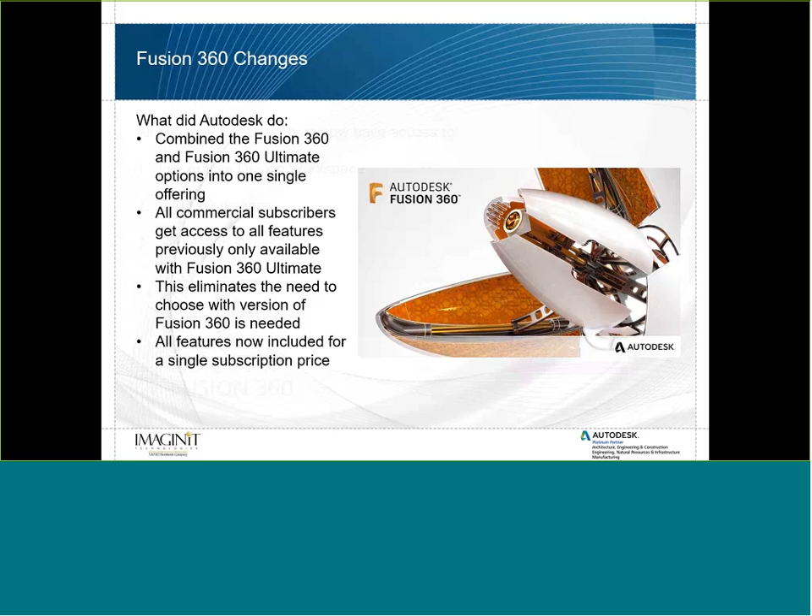So what has become available? All commercial subscribers now have access to the Generative Design Workspace, the CAM Workspace, and the Simulation Workspace within Fusion 360. We'll take a look at each of these individually as we go through the remainder here.

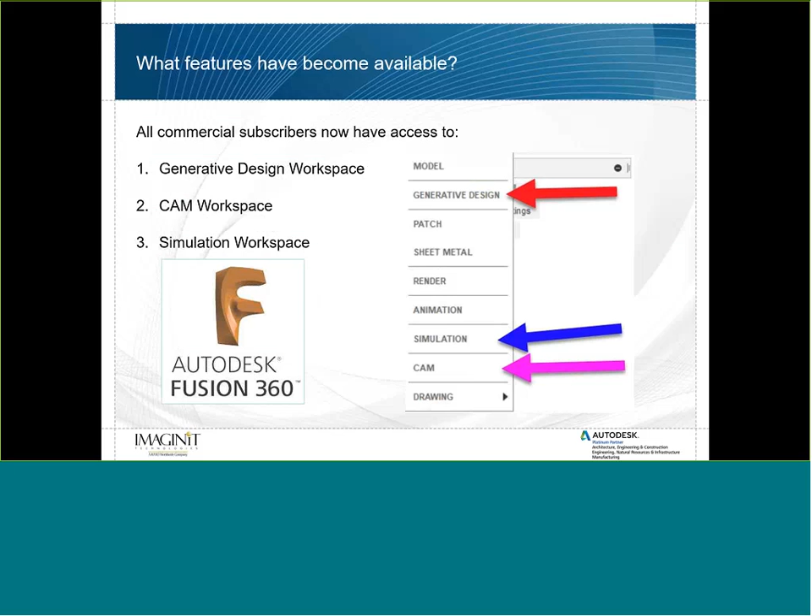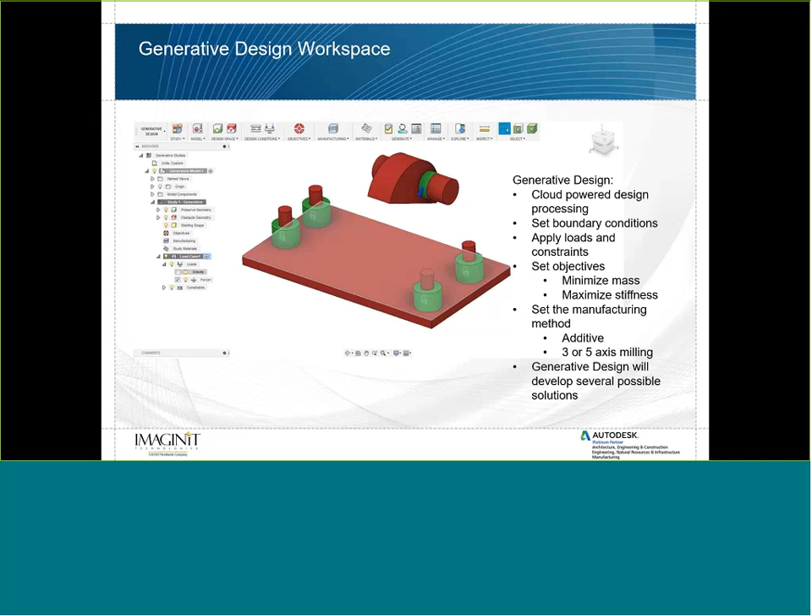For generative design, we're going to do a quick overview on the PowerPoint here, then jump into the software and explore it some more. Generative design is a cloud-powered design processing system software. What you do is set the boundary conditions for your part, apply a series of loads and constraints, and then set objectives - do you want to maximize the stiffness or minimize the mass of your part. You can set the allowable factors of safety, and set the manufacturing methods, whether it's going to be additive or 3 or 5 axis milling. Once we've done all that, we can run the study, and generative design will develop a number of possible solutions - some easier to manufacture, some not so easy, and some of the designs and shapes get creative. We'll dive into this more in just a couple of minutes.

You also get access to the simulation workspace. This is, again, a cloud-powered simulation because everything on Fusion 360 is cloud-powered. Fusion can do static stress, modal frequencies, thermal stress, structural buckling, nonlinear static stresses, event simulations - which is a preview of that - and shape optimization. We'll take a look at the static stress specifically today.

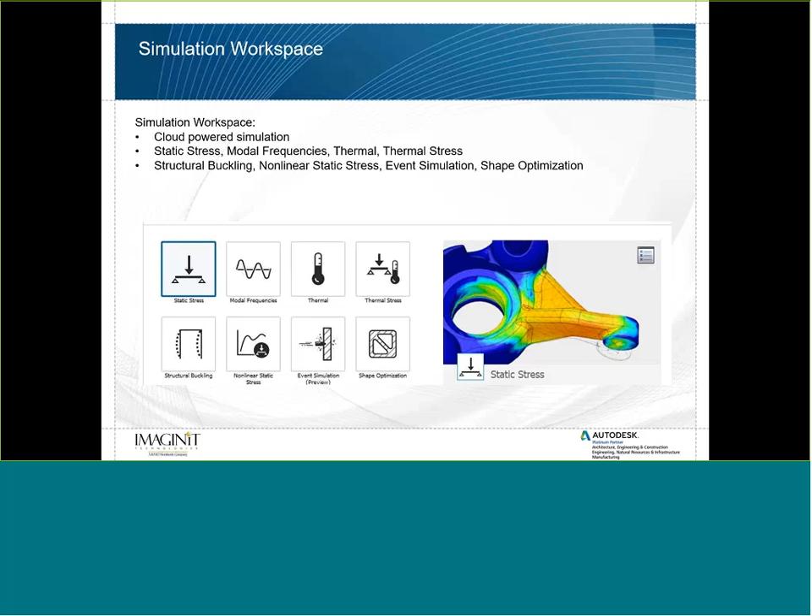The final workspace you get access to is the CAM workspace. If any of you have had experience with Inventor's HSM, you're going to recognize a lot of these tools here. So it's 2.5, 3, and 5 axis tool paths. We can do turning operations on a lathe, cutting operations, plasma, laser, water jet. The software provides tool path simulations to see how the tool is going to look as it moves around your part. We'll take a look at the tool library that Fusion has, and then maybe develop a simple post-process. Fusion comes loaded with a number of post-processors from common machine manufacturers that are already included. All right, one second here, and we will get into Fusion.

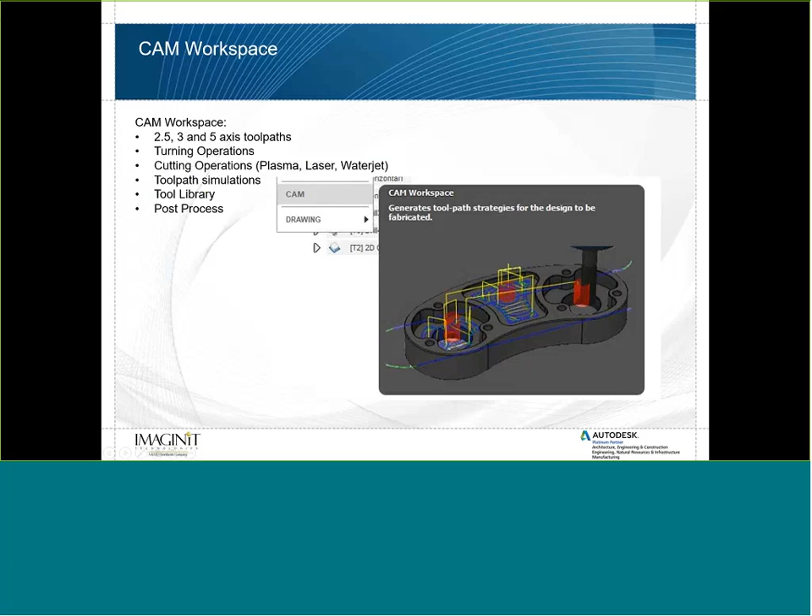Okay, so here we've got a simple lifting lug. Not a very complicated model, not a whole lot to it, but it'll be a good way to show the different tools that are available.

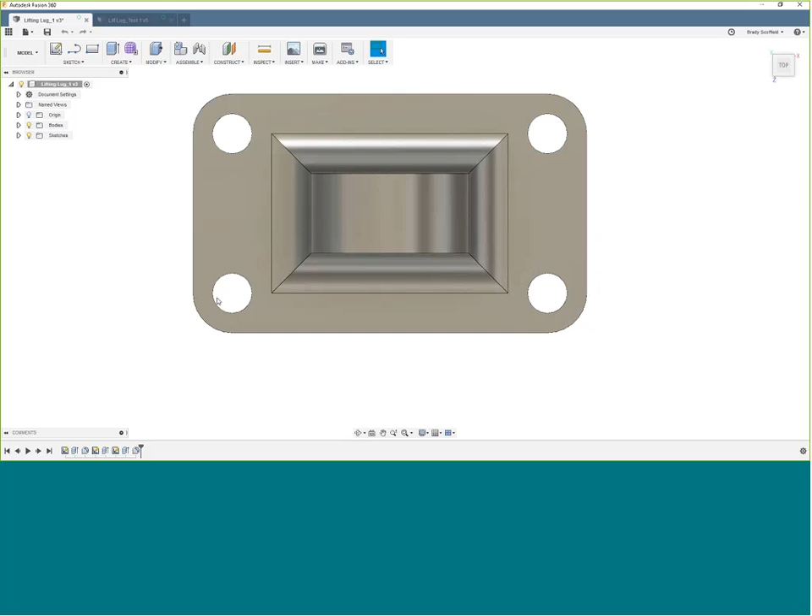So here we have the lug. You can see, looking down from the top, 4 holes in the top where this would most likely be bolted to some other fixture or part. And then we'd put a clevis or a pin through this larger hole to lift our load.

So we're going to start in the order we did the PowerPoint, looking at the generative design first. Here we have a simplified model, right? Here's the lifting lug itself. Click back, here's the model.

With generative design, without going too far into it, you basically model what you need. I tell it that I need to have a shape similar to this up top. I have a body going through the middle here where I'm going to do some exclusions to create a hole through there, and the same with these 4 posts down at the bottom.

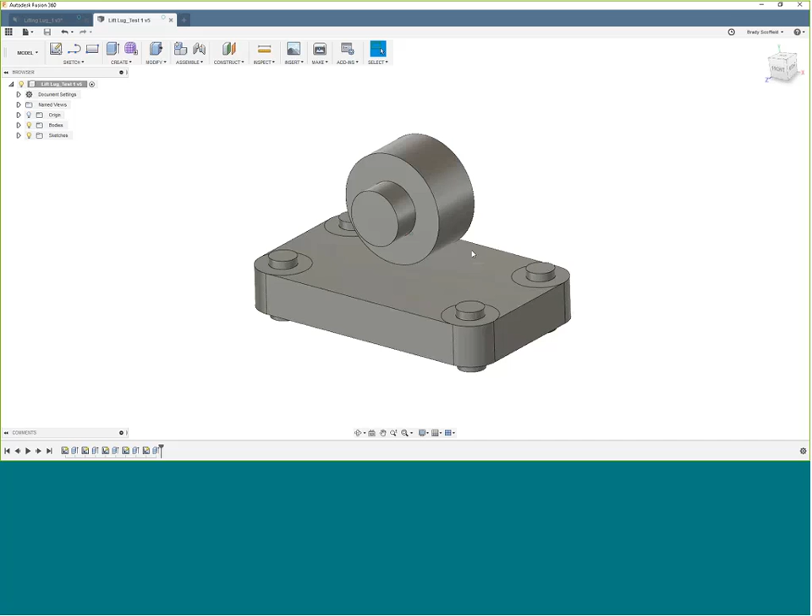So like with all of the other environments and workspaces in Fusion, you simply come to the Model tab, and then we click on Generative Design. This is a new location for this, as Generative Design in the past was located up here in the ribbon, and it was a separate software that would open up. They've now basically loaded it native into Fusion 360.

So if we click on Generative Design, we can see that I've got a couple of studies already set up here. But let's go ahead and start and set up a new one.

So I'm going to make sure all this stuff is hidden, and I'm going to generate a new study. So we've got study 4. I'll show you studies 1 and 3 a little bit later, but let's walk through the process here of how to set this up. So the first thing we need to do is come to this area here.

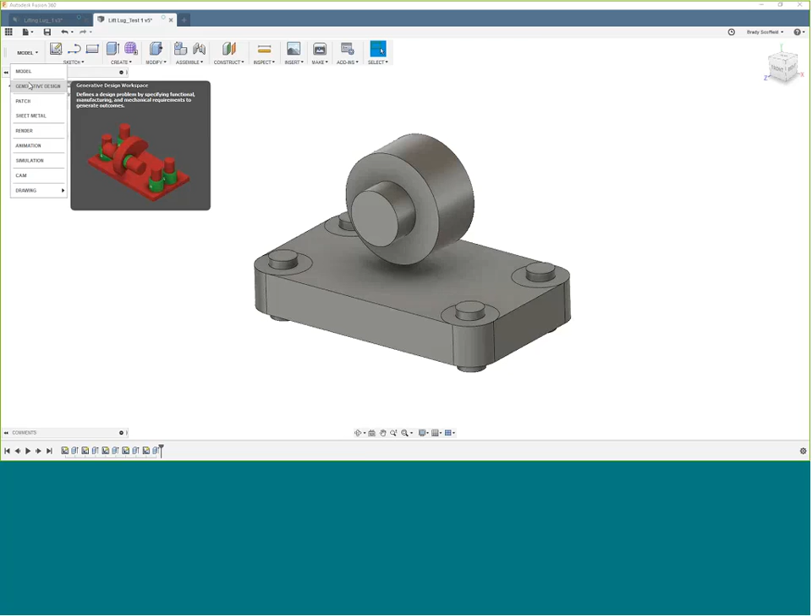We've already got the model loaded. If you want to edit it, we could go into the Model tab or the Model option and change it. But we're going to pick the geometry we want to preserve, like what shapes we want to maintain in our study. So I'm going to select, I want to maintain that shape, and I want to maintain that kind of square base. Once I've got the 2 bodies that I want, hit OK, and you can see they go green.

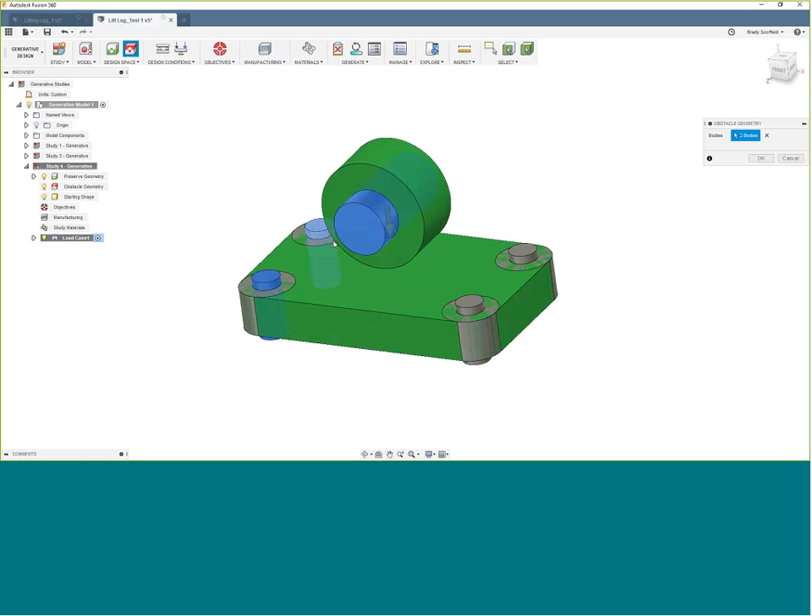So now we're going to select this obstacle geometry, and once we select the things where we want to maintain holes or some voids in the part, I'm going to select those, and those go red, and these will help to shape the final outcome of the design.

Okay, once I usually have this done, I come in here and just turn off the visibility. All right, so now I can see those surfaces that I want to apply some constraints and some loads to. So once we've got the geometry picked, again, we're going to kind of work left to right here.

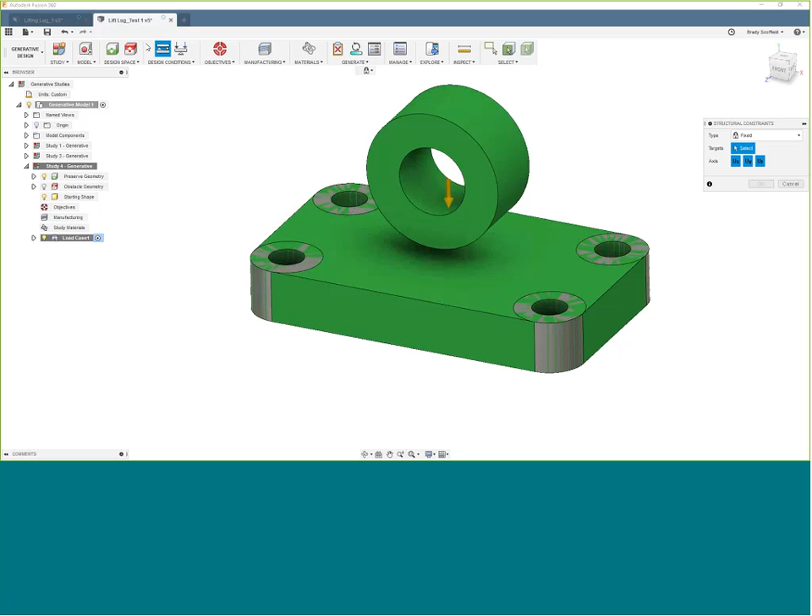We'll say some structural constraints, right? I know this is going to be bolted down with bolts through here. Select OK. We can then apply a load condition.

All right, we'll do a force. Let's say we're going to do a lifting force here. We'll change the units to pounds force and say 500.

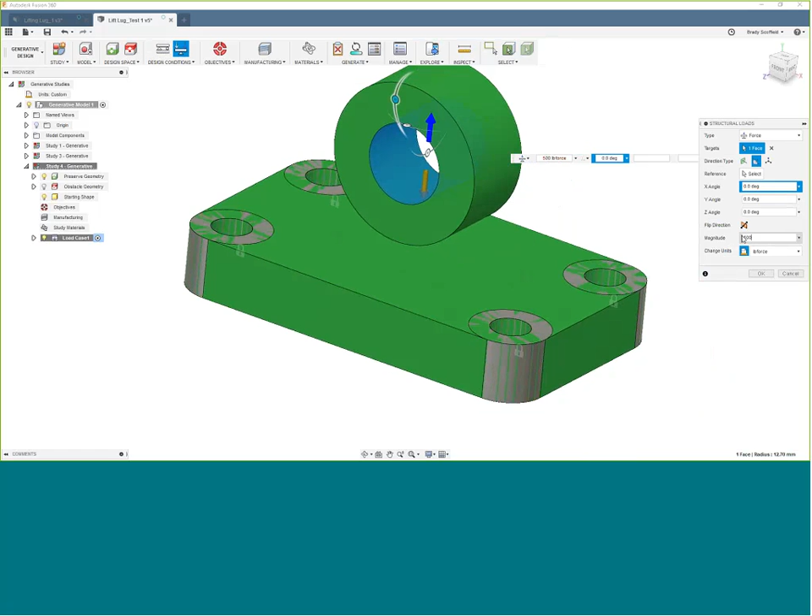If we come over to our browser or our model tree over here, you can see they've got the loads and constraints in here. We can also expand and see how many bodies were preserved, how many bodies were considered obstacles. Gravity is loaded by default.

We can either turn that on or off, and you can quickly select and change loads as you need. You could have multiple loads in one study.

Okay, so now let's do our objectives. Do we want to minimize the mass or maximize the stiffness? So I'm going to do stiffness on this one, and let's say a safety factor of 3.5, and a mass target, I don't know, 5.

Right, we won't actually run this study, but we'll take a look at some of those other options. Manufacturing, this tab is a little bit more complicated.

Unrestricted is going to basically let it do whatever it wants. Generative design was initially geared a lot towards additive manufacturing, but they've added milling options now. So if we take off unrestricted and take off additive, let's say we want it made on a 5-axis machine.

You could set these to be your tool numbers or tool diameters and sizes. We'll just leave the default values there for now, and then we need to pick the materials.

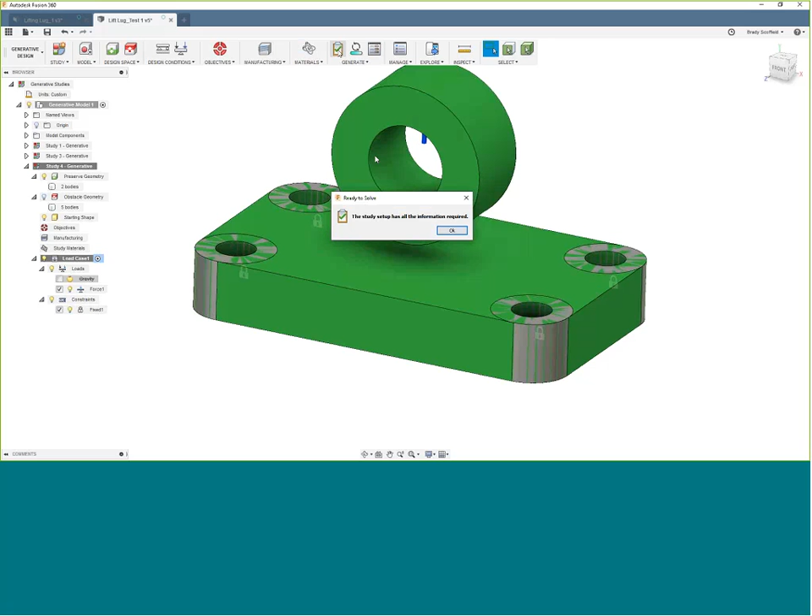They've introduced this pre-check, which basically gives you a quick check to see if you've forgotten anything or if anything needs to be added. This one says this study setup has all the information required. We can hit OK, and this is where you would go to solve your problem.

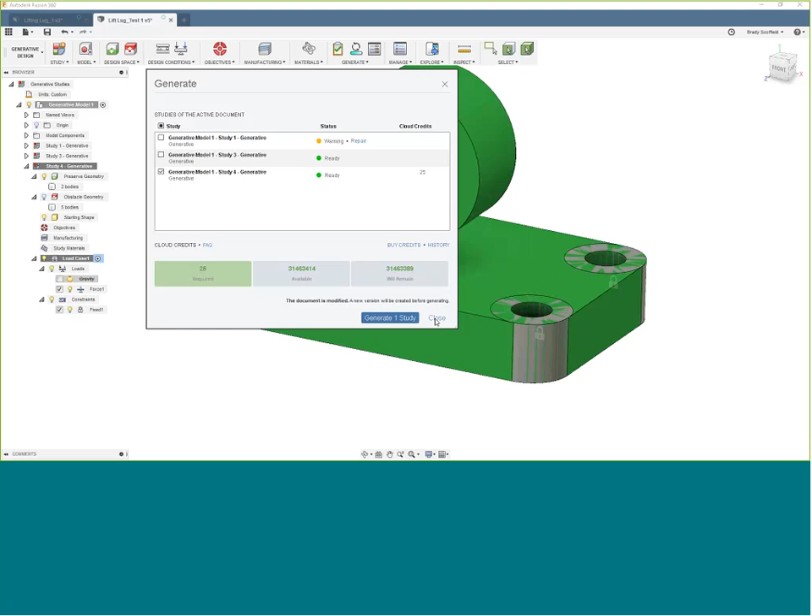It does require 25 cloud credits to solve. You can see I've got a couple here already done. So we're not going to run this study because it takes a long time, especially with me streaming the webcast over my internet connection and trying to process this in the cloud—it would bring things to a crawl.

So once you have run it and the study's begun, you can go to your Explore button right here, and this will show you the number of solutions based on the studies that you have run. So here, if we look, I've got study 1, you can see the results for study 1.

There's some study 3 results there, and again some more. Each of these we can click on. So if we look at Generative outcome 1, if you click on it, you take it into kind of a 3D previewer here.

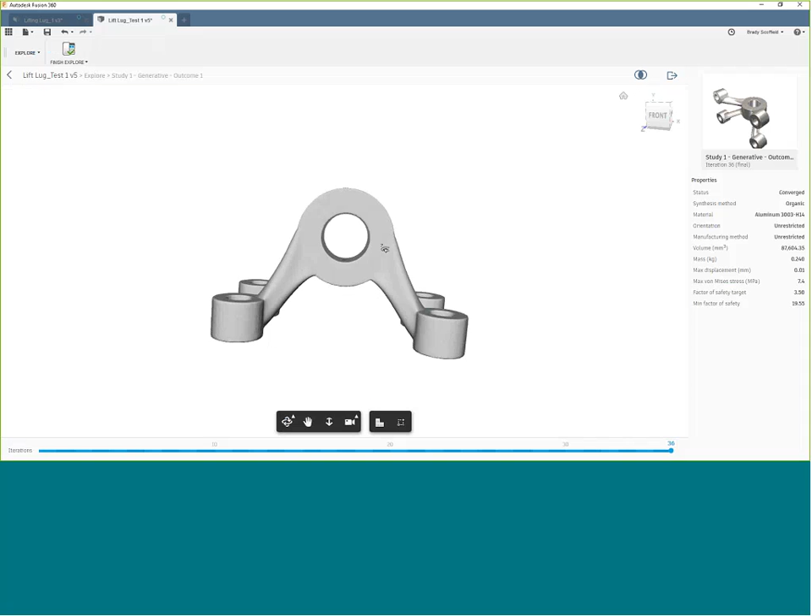We can see that this has got the 4 bolt holes still there where I want to bolt this down, and I've got the hole through the middle. So we'll look at these statuses.

This is a converged design. It was an organic synthesis method. What's the material? This aluminum 3003-H14, orientation unrestricted. There's the volume in cubic millimeters, and the mass—you can see this isn't very heavy, only 0.24 kilograms.

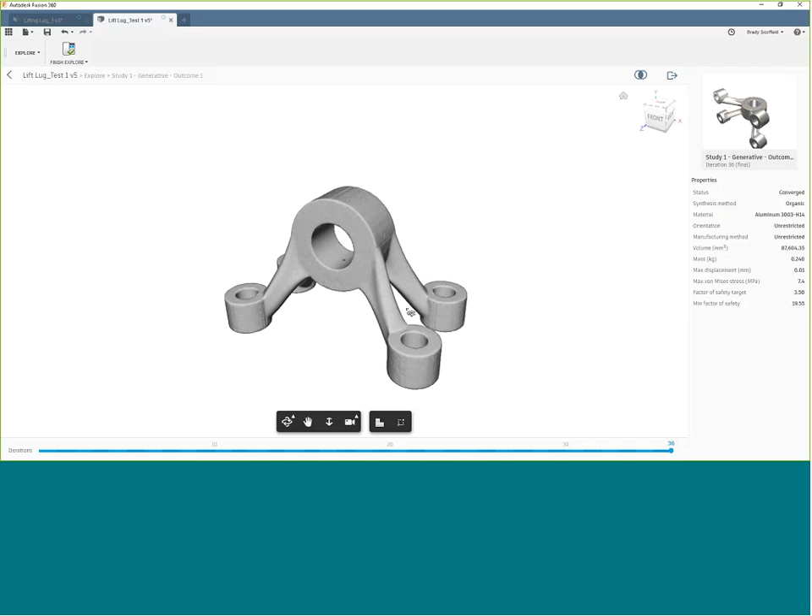All right, factor of safety. So we can see all of these. We can explore and look around the results.

Well, let's go back and look at something that's more traditional design. Let's look at this one. This one looks pretty close to what I was going for.

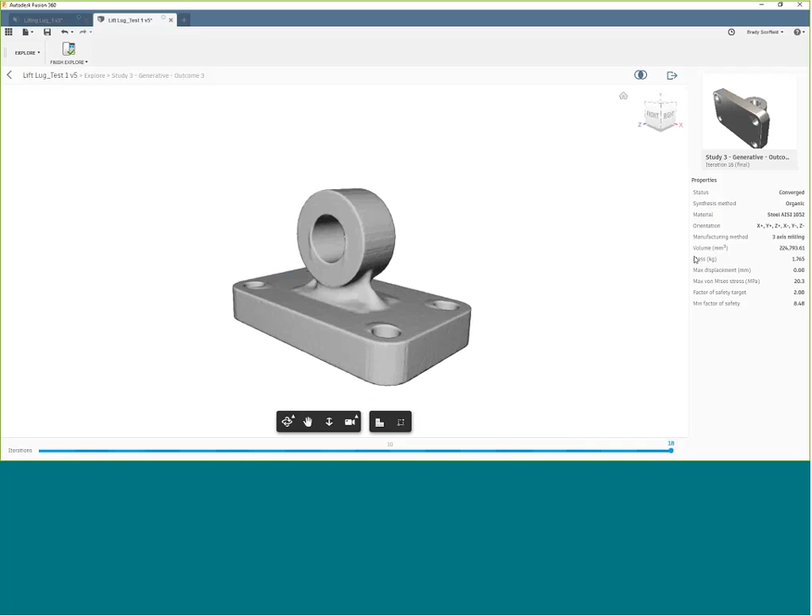This one, they say you can do it with 3-axis milling. This one's a little heavier at 1.7 kilograms. If we go back, let's maybe take a look at this guy here.

Very similar. And then we can compare a number of these. If we look at the display options here, these are the thumbnails—we can look at different properties of all of these.

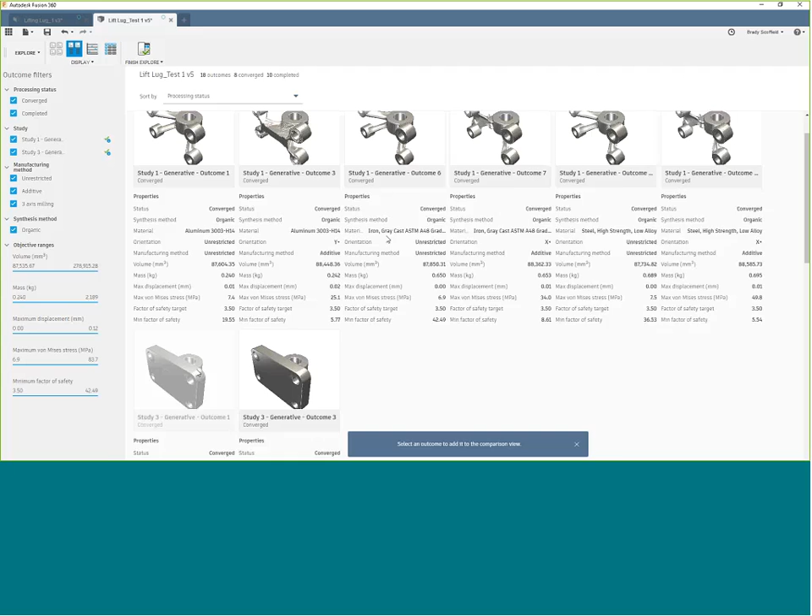If we compared this one to, say, this one, I can look at a side-by-side view of these, and then compare the stats by clicking on each one.

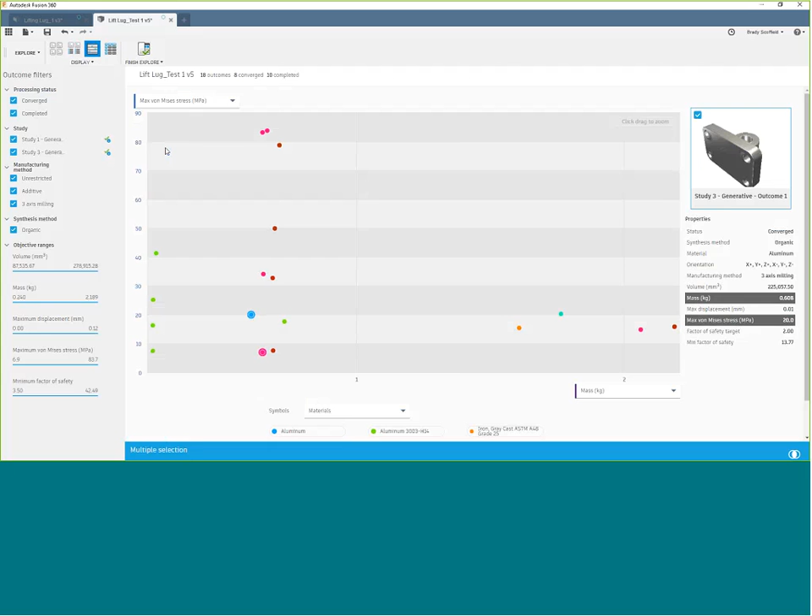We can go back. We can also look at different graphs, saying let's sort on the minimum factor of safety, or let's check the max displacement for these. So it gives you a bunch of results without you having to take time to model 9 different solutions and run tests on them.

Okay, so once you've done this, you could pick your design and then import it into Fusion, and we could go from there. Again, that process is going to take a while because it's cloud-based, and since we're streaming the webcast here, we're not going to do that. We'll just say that we pulled down a design that looks similar to this.

Okay, so now let's look at the simulation environment. We'll switch our model here from model to simulation. And I've already run one study, right?

But this is going to be very similar to the generative design workflow, except that we already have our shape determined, and we just need to tell it where we want to hold it down and where the loads are going to be. So if we wanted to run a new study, let's do static stress, create the study, and let's simplify.

No, didn't want to do that.

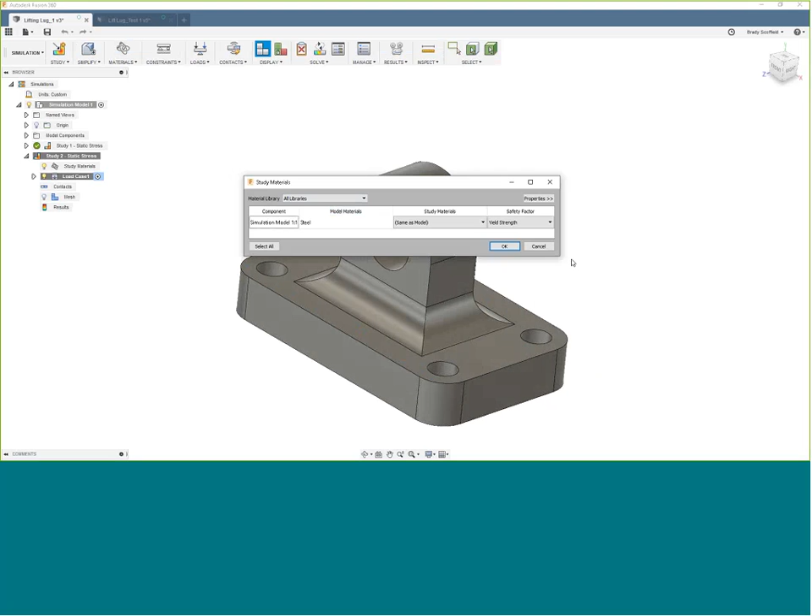All right, so the first thing we're going to do is pick materials. Again, these come from the libraries built into Fusion. Let's come down and find a high strength, low alloy steel.

The constraints and loads are going to be very similar to what we did in generative. Let's pick it to be bolted down on these 4 holes. Okay, the loads.

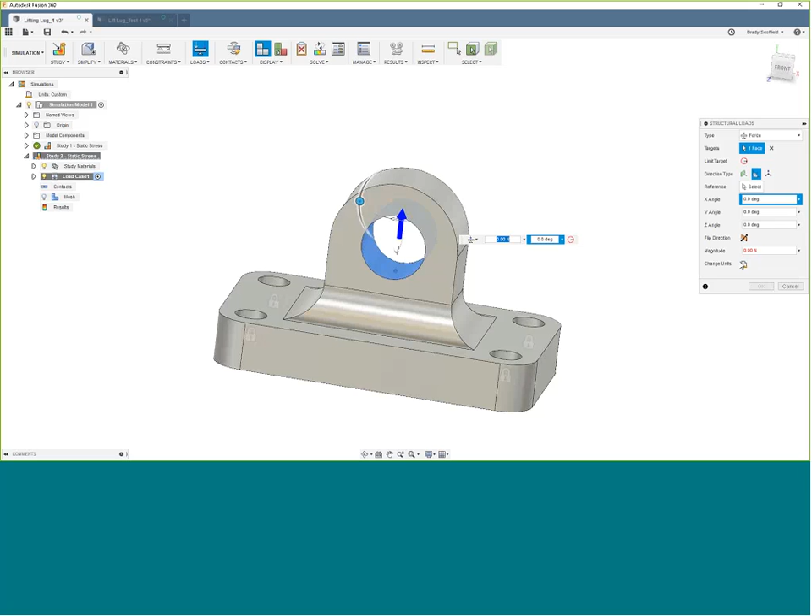We'll do a force load on that surface, change it to pounds force, and type in the same amount there.

We could do a quick check and then run the solution. Again, this requires 5 cloud credits to run the simulation study. I've already got one done, so we'll take a look at the results from that one.

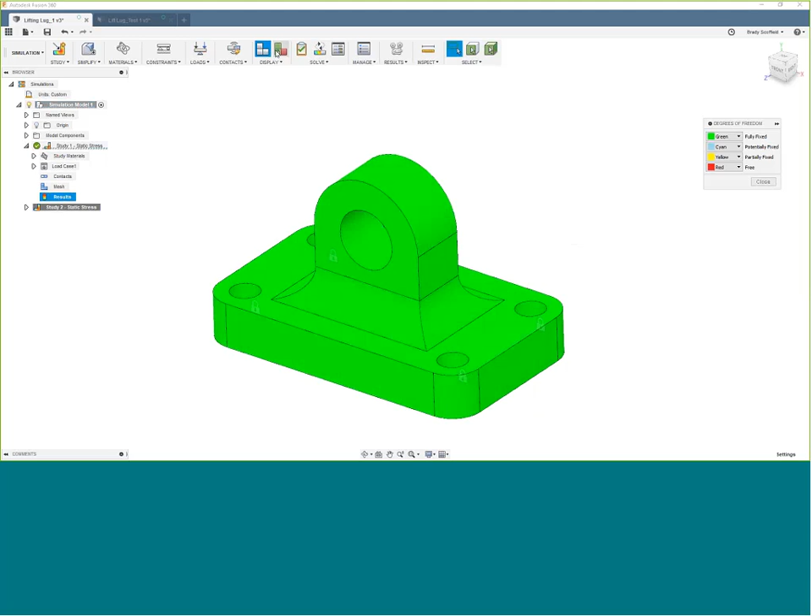I'll close that. I'm going to come back to, let's see, let's close that. Let's go to study 1 and look at the results. Where'd they go? Okay. Oh, that's not the right one. I can't seem to find it. No, they were there a second ago. Oh, there we go. Just had to make it active.

All right, so we can see we've run this. If any of you guys have run simulation type softwares before, you get kind of the same issue, the same graphs and displays here. We can pick on safety factor or stresses. You can see where the brighter oranges are, where the higher concentration of stresses is going to be, right? Kind of in the corners where it's going to be bolted down. Switch these from von Mises to various other stresses.

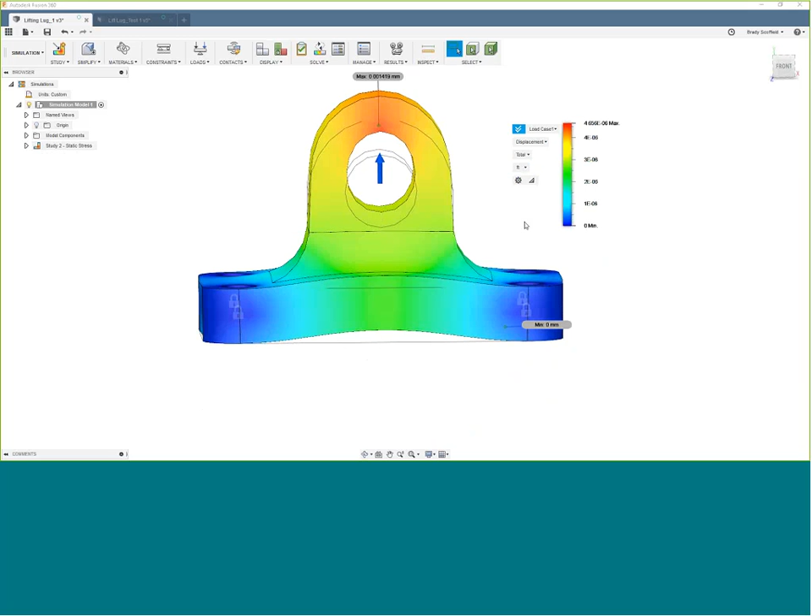Look at the displacement. How much is this going to move? Let's change these to inches. All right, that's going to move very, very little, 5.587 times 10 to the negative fifth. So not moving hardly at all.

Reaction forces, you can see we've got some reaction forces here where it's being held down. And then we can look at the strains on these. So very similar to any other static simulation software, but it's very convenient that it's packaged right in here with all of the other Fusion tools.

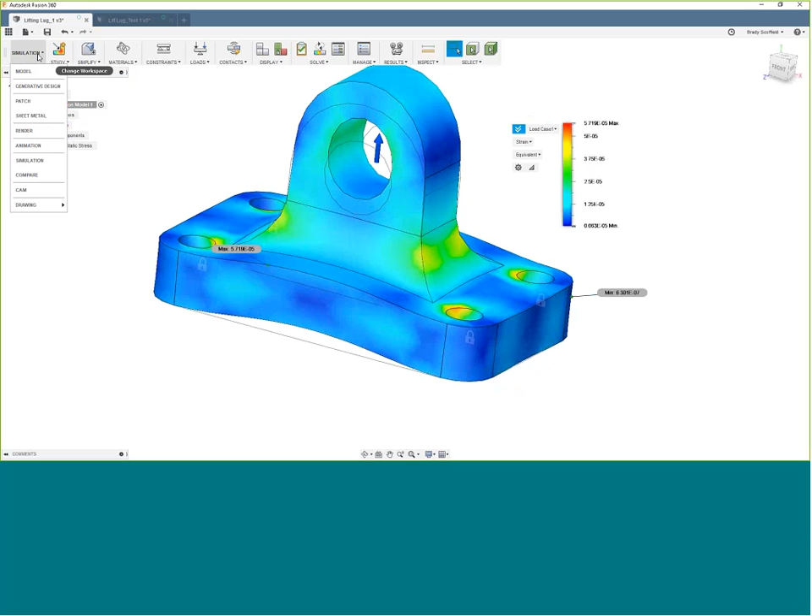All right, so the final tool that we are going to spend some time looking at here is the CAM environment. We're just going to switch from our simulation to the CAM software. Again, I've already run through and done a setup, but this one we can take step by step because there's no cloud rendering required. We can do these all brand new.

So the first thing that we do once we get into the CAM environment is we need to do a setup. Okay, so here's the setup. We're going to do setup 3. The first thing we do is go through and tell it what kind of operation we're going to do. We're going to do this in a milling operation.

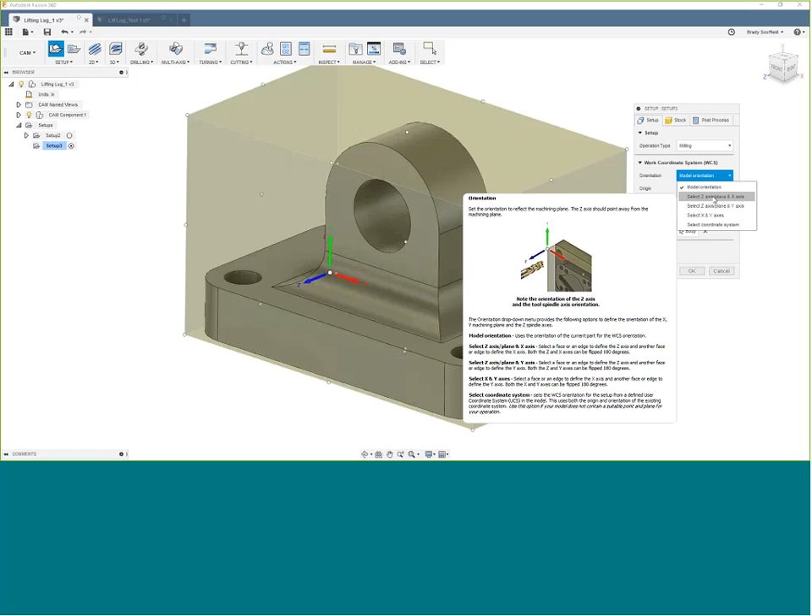The model orientation is not correct in this case. For CNC machines, the Z-axis is up, and here we've got the model with Y up. So we'll make a quick change. We'll select the Z-axis and plane, pick the top here, so now Z goes up. And select X to be that way. Yeah, that'll work.

Let's see, we can also pick our stock point, right? Where do you want the model, the tool to start? Now let's change this here to selected point.

Okay, once we get this set up, let's go to the stock. Now, the shaded area here represents the stock material, what this part is going to be made out of. There are a number of options.

We can do a fixed size box where we come in here and type in the dimensions. We can do a relative size box where we say, hey, just add 40 thousandths to either side, or so much to the top. So here we could say, let's add 60 thou to the sides, 60 thou to the top.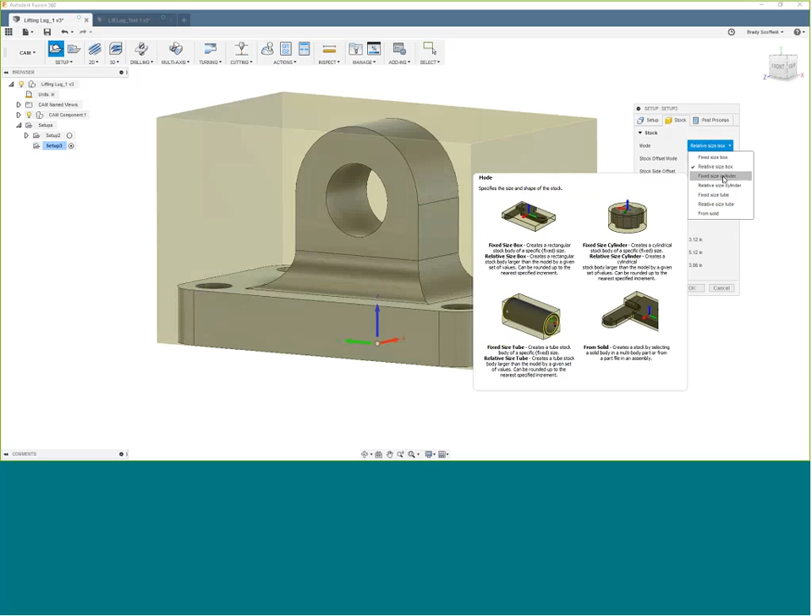All right, the fixed size cylinders here would be for turning operations, same with the tube, or if you have a round shaped part. And then from solid is an option to model a secondary solid that you could then pick for your stock instead of adding in the size. But we'll add the size here.

Post-process is where you can give this a program number and comment. It defaults to 1001, but you could change that to what you need. For the comment, we could call it the lifting lug. And if you know you're going to be doing your offsets, you would adjust those here. We'll add a 1, and hit OK.

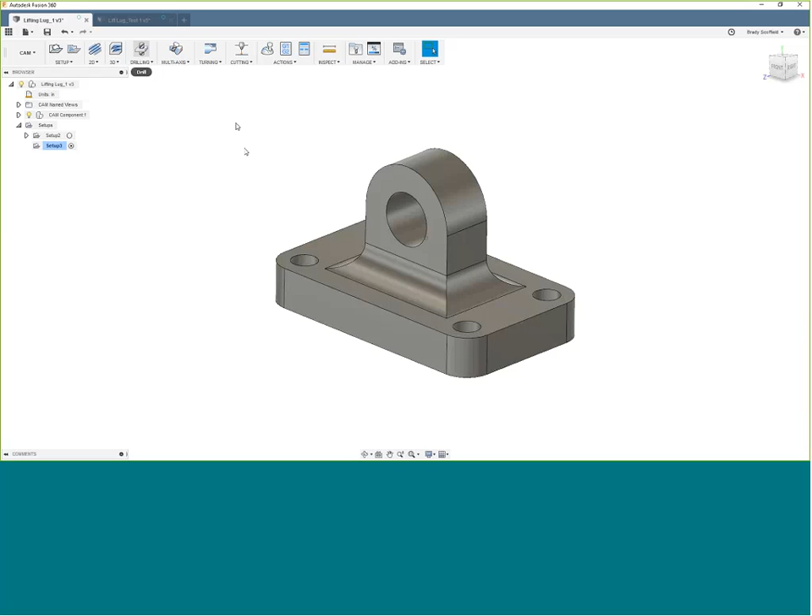So we're going to work through the operations up here on getting these done. I'm going to have my setup 2 here as a reference so I can work the same thing.

Before we get into that, let's take a look at the tool library. It's going to be this icon right here. This will pop up whenever we select an operation, but I like to get things organized beforehand. So this is the built-in library for Fusion 360. You can see you can have local libraries. Right here, it's got all the tools I've used in this document at a previous point.

Then if you work with a certain tool vendor, you can search their tools. So here's a Harvey tool, here's all the end mills that they have. They've worked with Autodesk to get these loaded into Fusion 360. If you're using helical solutions, there's a lot of end mills here. You've got aluminum alloys and non-ferrous. They got steels, different tools for different materials.

Maritool, these are the holders. See a big catalog of their holders. Tormach, these would be your cutters, laser cutters, and other tools. Or you could simply look through the library here based on, if you're using copper and you want to use inch tools, or if you're using high carbon steel and you're using metric tooling. These are all here.

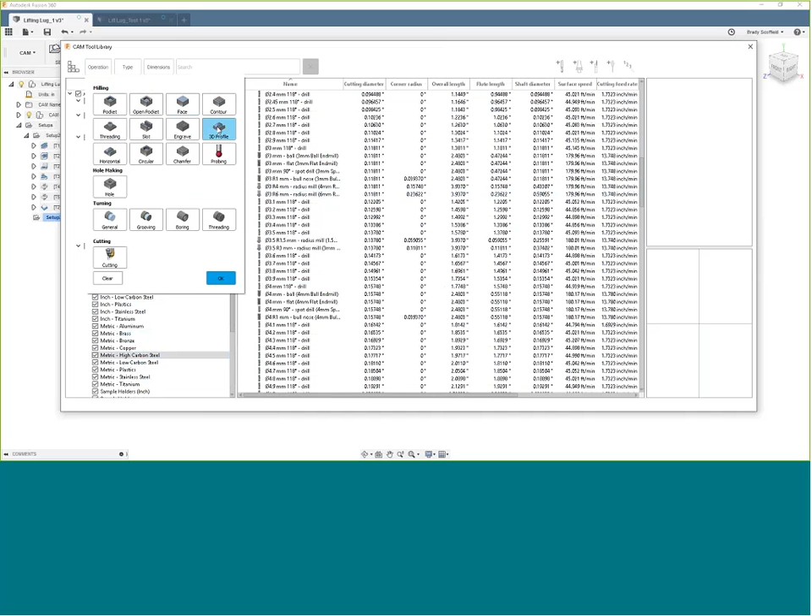You can also search up top by the different type of operation you're doing, whether you're doing a face or a profile or you're just probing. We pick probe, hit OK, and we can see search for a probe tool. And if I hit all, let's see if we can find... bad example on the search. But we'll search when we're setting up these different operations.

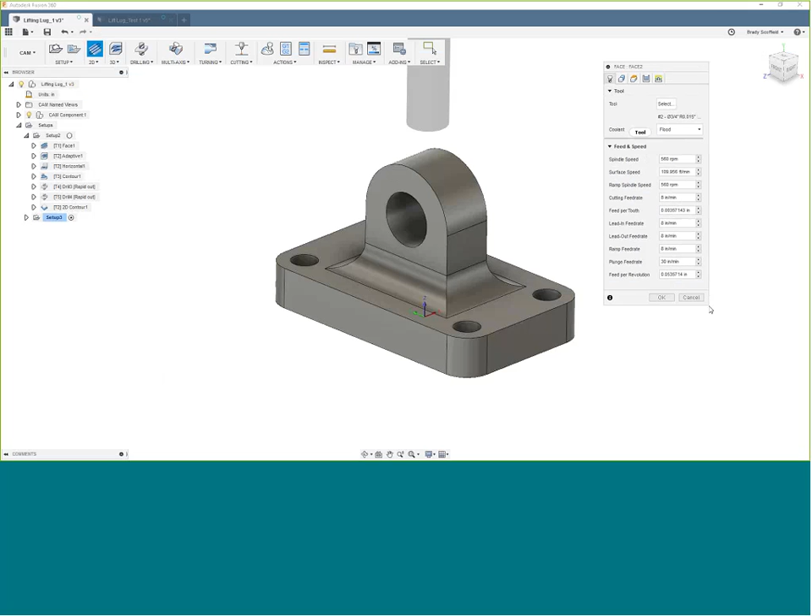So the first thing we want to do is a face, right? We always want to cut the top off the material to get the true top of the part. So I'm going to pick the face command, and it's going to bring up our dialog box here. The first thing we do is select the tool.

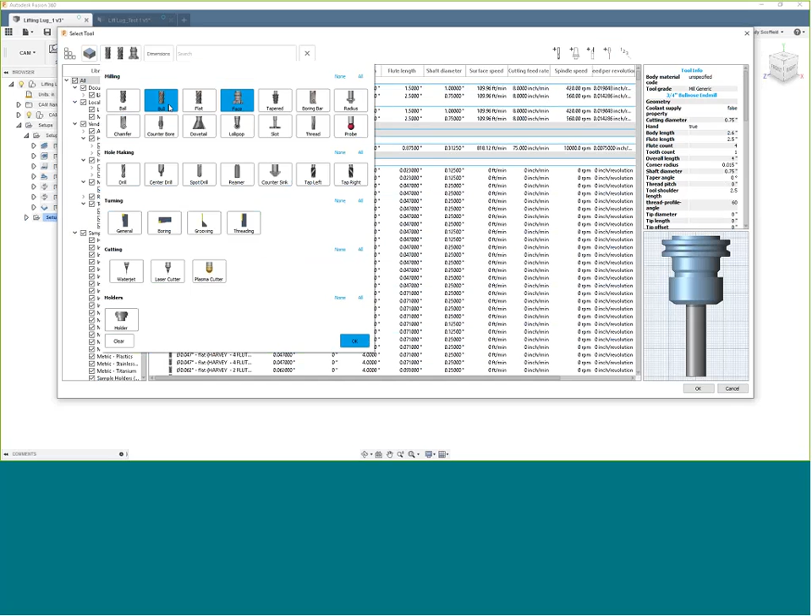Now I could say, hey, I know I want to use my 1-inch flat end mill. Let's come to all operations, pick a facing operation, hit OK. And type, I want it to be just a face mill, so I'm going to leave face mill highlighted, hit OK. Dimensions, we'll clear that out and hit OK.

And then I'm going to pick down here on inch stainless. Why didn't it bring it up? Let's clear that and go to inch here. And then we can change dimension, let's say a 1-inch diameter. Or you just search it here, 1 inch. And you can see here we've got a 1-inch flat. So that could be used for this one.

Facings are pretty straightforward. We don't really need to select a whole lot. The heights should be good. It should automatically cut the top of the stock off and then leave us with the top of our model. All right, so here you can see we now have our toolpath generated.

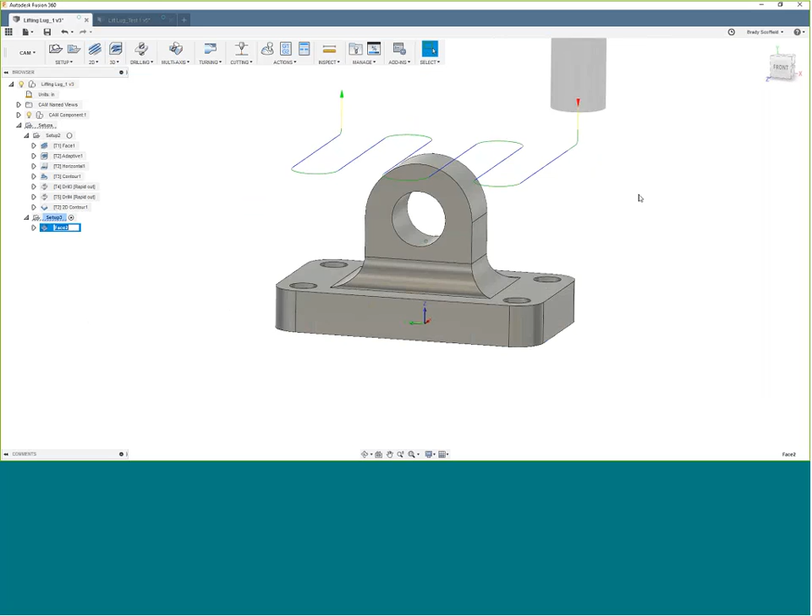Okay, if we wanted to take a look and simulate this setup with this first operation, you would right-click on setup number 3, hit simulate, and then there are some options we'll go through. I like to see the stock, so I'm going to put a check on stock, and I tend to go with a transparent model so I can see it shaded but still see my part through it.

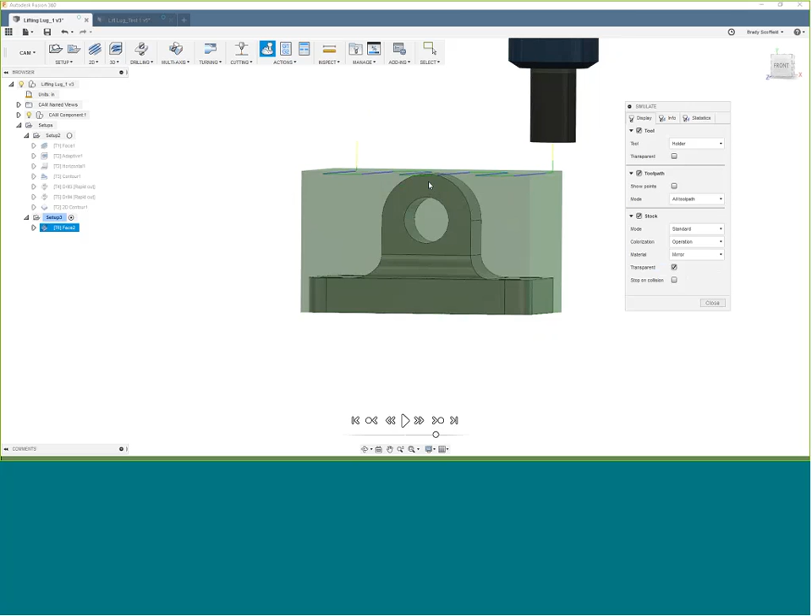The toolpath, you can have it show the entire, but I tend to say just the tail. I just want to see the tool as it goes through where it's going. The info, these will all change based on what we're going on, and we hit play, and you can see it simulating here how the tool is going to go through and remove the material.

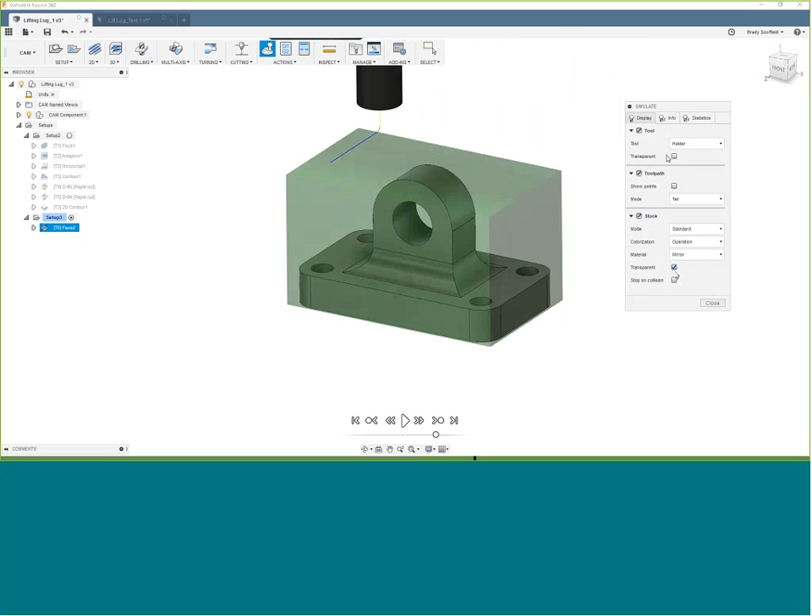All right, so if we took it off transparent here and ran it back, you can see it's going to cut away that top little bit of material there.

Okay, now that we've done that, let's go ahead and put in a toolpath to clear all of this excess material around the outside.

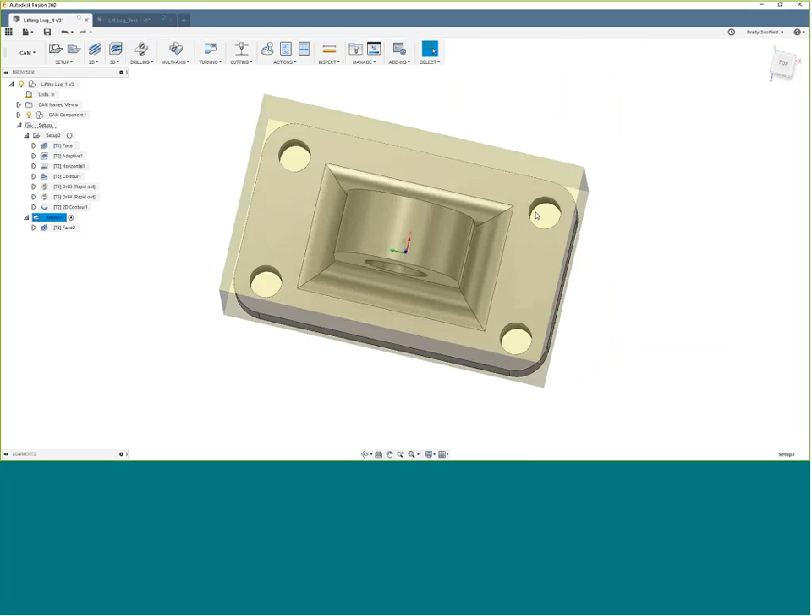Something you can do if you already have a setup working is come here and copy this one, then paste it down to setup 3. I pasted the operation here. It's going to have an invalid toolpath at first. To get around this, right-click on your toolpath and hit Generate. It will calculate what it's trying to do and develop a toolpath for you.

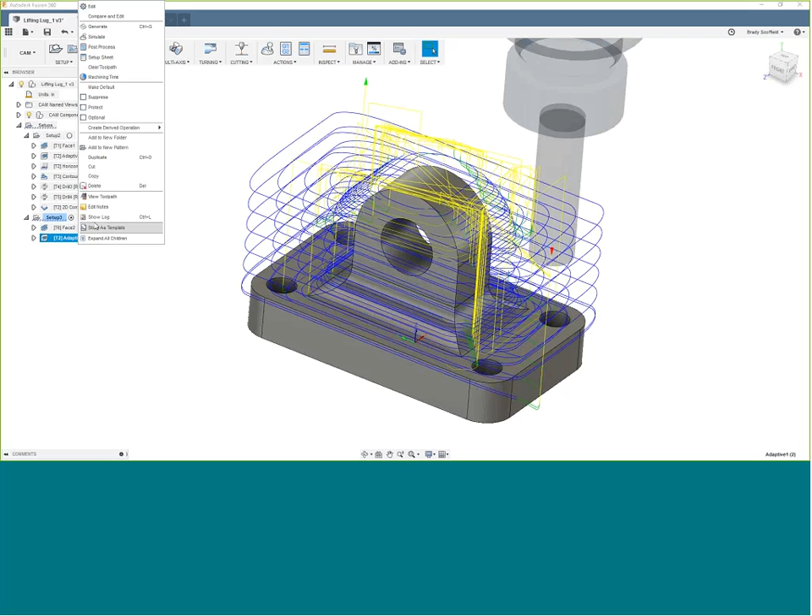Now let's go ahead and look at the settings here. I'm going to right-click and go to Edit. The tool we've already got selected - it's a 3/4 inch bull mill with a 0.015 radius on the edge of the cutter. The feeds and speeds you can adjust; these were calculated from the tool library.

The geometry, we haven't really picked anything - we just want it to clear out all of that excess material that we don't need. I did have a check next to rest machining, which removes the remaining stock material, and we set it from the previous operation, which was that face. We don't need to use setup stock because we've already done one operation. I've adjusted this to use as computed, because sometimes it'll tell you there's too much stock or that the stock adjustment has reached its maximum value.

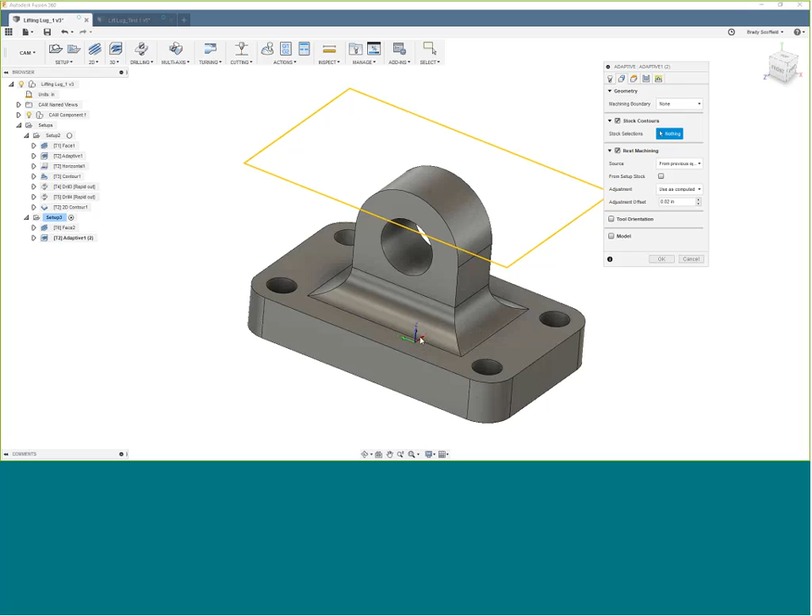Tool orientation - if you check this, it allows you to set your orientation. If you've got a 5-axis head, you can do different orientations; this is where you would do that. We'll do that for an operation further down, but I'm okay with this orientation as it is shown right here.

The heights - let's look at the heights tab here. By default, the 3D adaptive, which we have selected here, would machine all that it can. I've told it that I want it to stop at the bottom height, and I've selected it to this surface, so we don't have it cut in the bottom of the outside here.

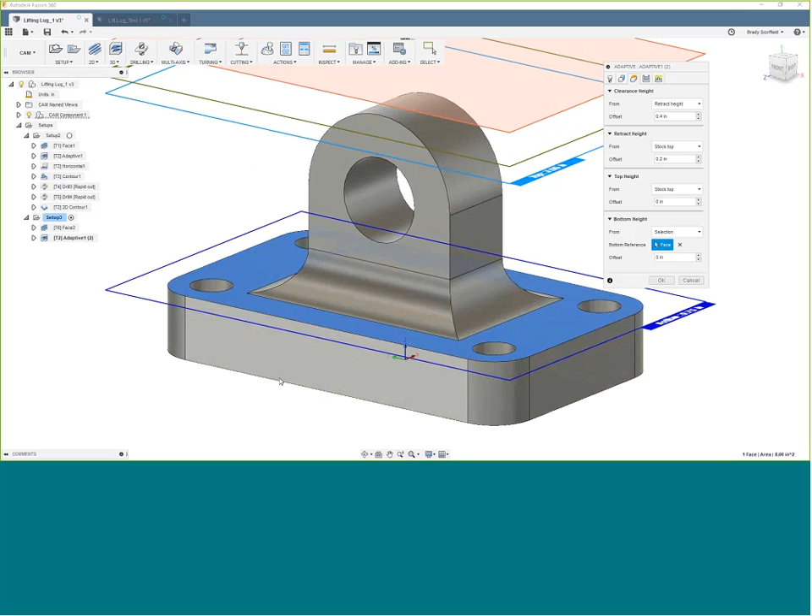All right, taking a look at these - this is the passes tab. Most of the time these will be default values. The one I changed the most here is this stock to leave. Here I want to leave 20 thousandths radial stock, and then 20 thousandths on this flat surface.

The linking tab controls the tool movements, the radius in and radius out, along with other leads and transitions. We'll hit OK, and the toolpath should recalculate quickly here for us.

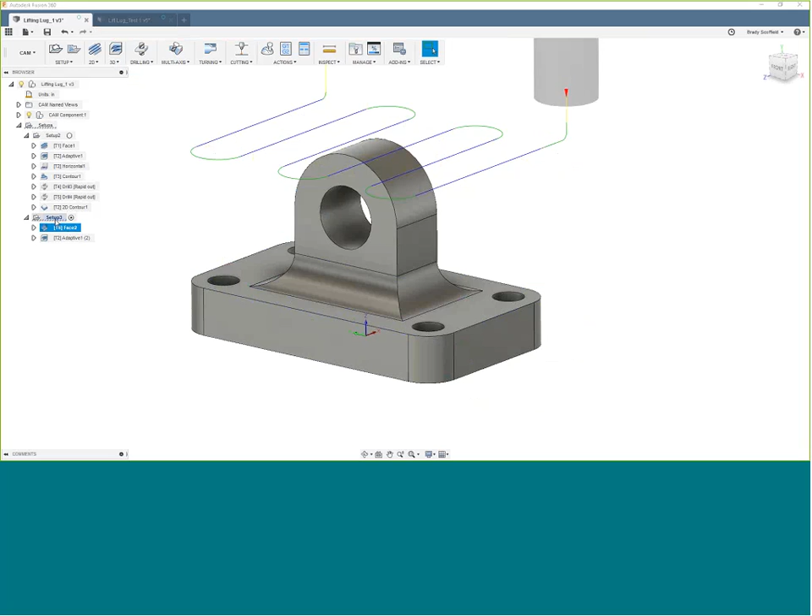Now if we want to simulate both toolpaths, if you simulate just one of these, it will only do that operation - it won't do what came before it. So when I simulate, I always like to click on the setup, right-click and simulate. It will remember your settings from the previous simulation.

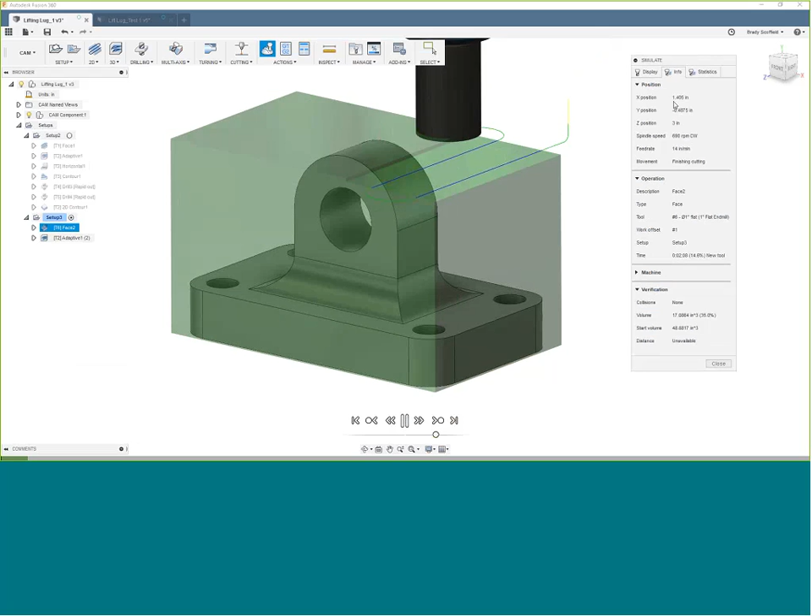So if we hit this, let's take a look at the info tab here. You can see the X position is calculated, the Y position is calculated, along with the different speeds. I have a rapid lead in, now it's a cutting motion, and we can watch this tool go through and remove the material. The coloring here - the first operation was green, the second is blue - that's because I have the color set on operation. We can also speed this up a little bit.

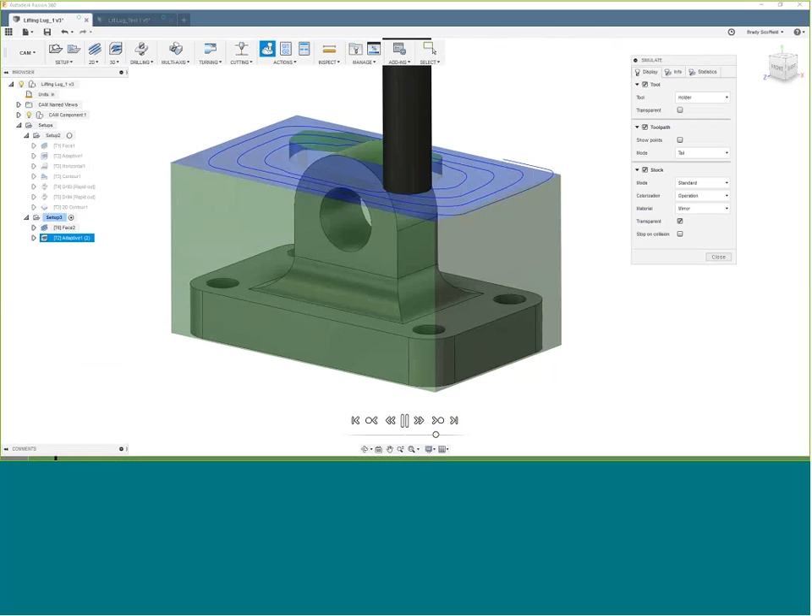Again, we can look at the info and statistics. For these two operations, it's a total of 14 minutes, and we've got 780 inches of machining distance. All right, 2 operations and 2 tool changes.

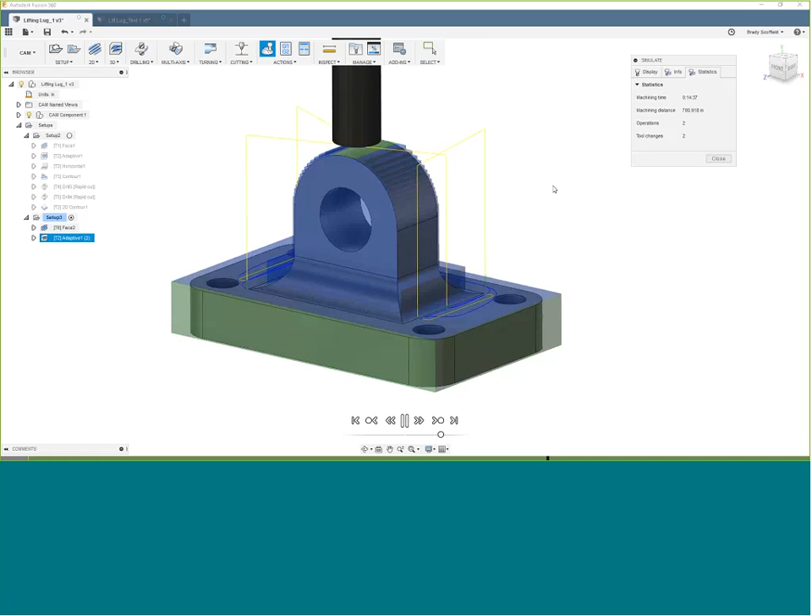Okay, and it's all set up. Now, to finish, if you have these already here, you could copy the rest down, if you had them from some other operation or were doing multiple setups on a single part. Let's just shift select all these, copy them, click on setup 3, and paste. They all have the red stop sign saying these are invalid toolpaths. You can click on setup 3, right click, and do a generate.

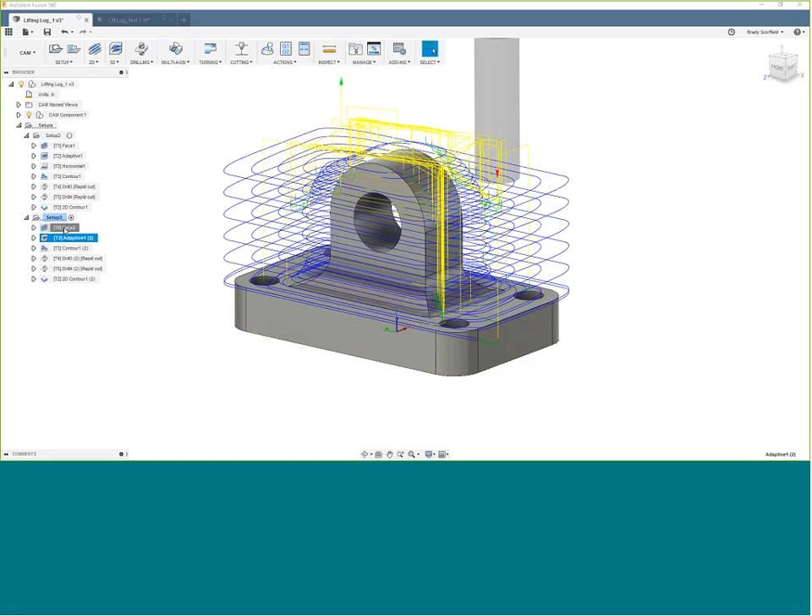It will generate all of the operations. The adaptive takes the longest to calculate because it's the longest toolpath removing the most material. So we've got the facing operation, which we did, the adaptive put in, and the contour is going to come in here and do a nice finish on this vertical surface for us.

We can run through and show the whole simulation here in a minute. We then did a drilling operation to cut the holes through here.

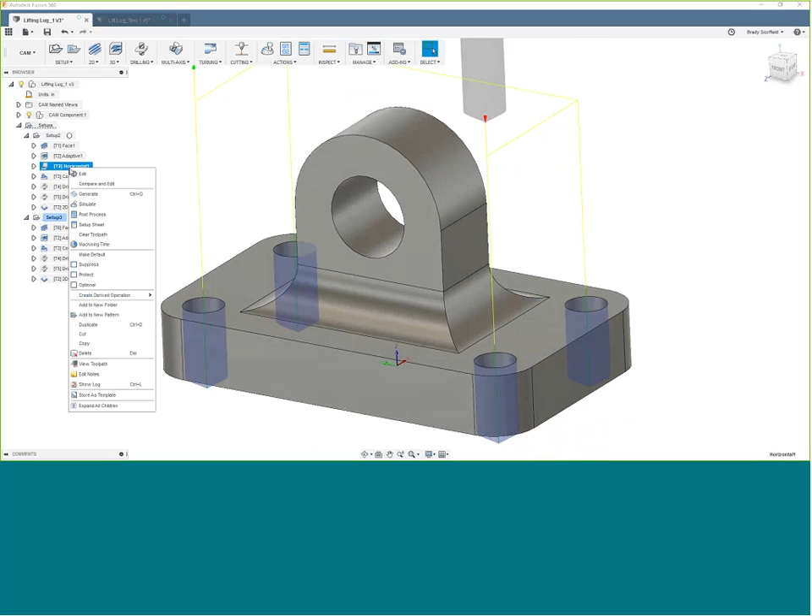Oh, we did forget to get the horizontal, so let's copy the horizontal down, drag it up and put it in front of the contour, and then run a quick generate.

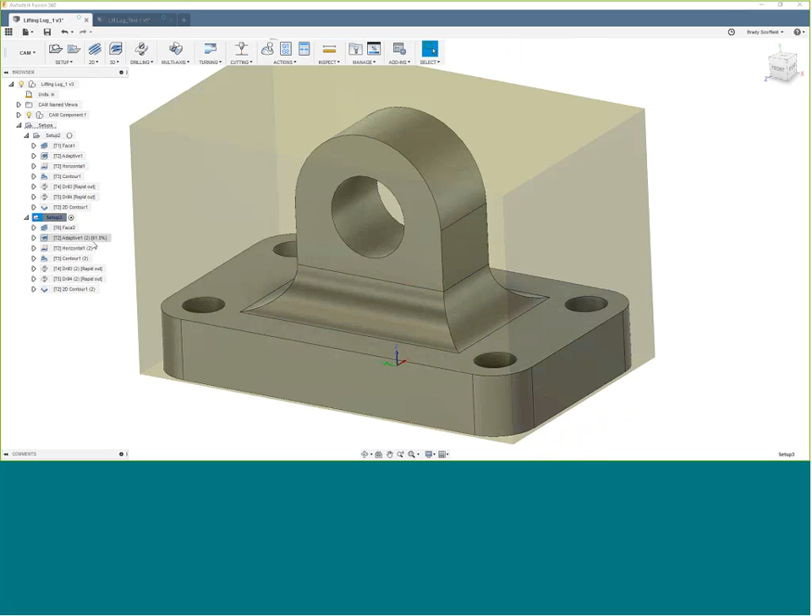So the horizontal, the one we just added, basically comes down and finishes this flat surface where those bolts will be going through. Then the contour comes and does the outside of the lifting lug, the part that's sticking up.

The drill here, simple, straightforward, drilling through the part. One adjustment I did add to this one is taking the heights and setting up the bottom height to break through the bottom, so we go all the way through the part there.

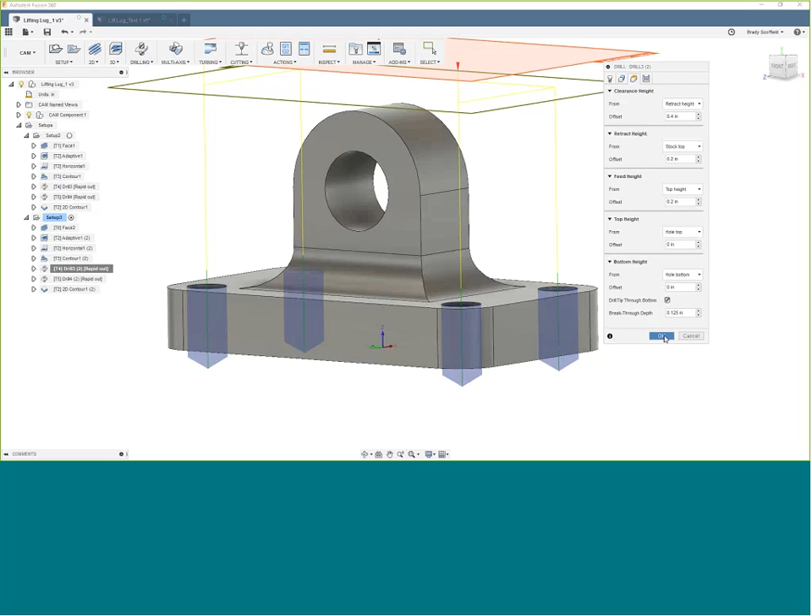This other drill operation here, this is where we adjusted the tool orientation, so now it's coming in from the side instead of straight down. We did that by selecting our tool orientation here and then selecting the Z-axis to be along the axis of the hole there.

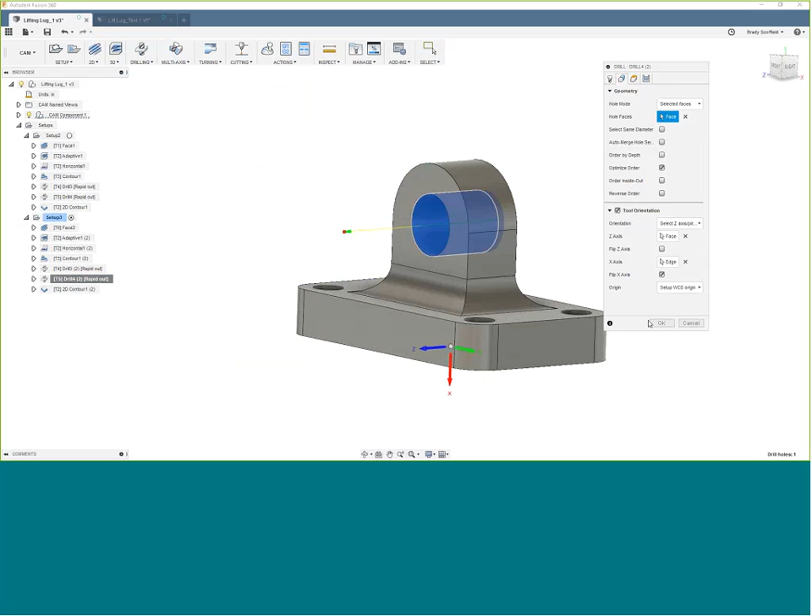Then we did a final contour to finish the outside. Once all this has been done, you can then go to the post-process. This is where it converts the toolpaths to the NC code that your machines will run.

Let me bring that over to the right screen. Here you can tell it where the configuration folder is going to be. This is where you would select the controller that your machine has, or we could go with the generic. Let's do the Haas one here. This is where you can adjust some of the post settings.

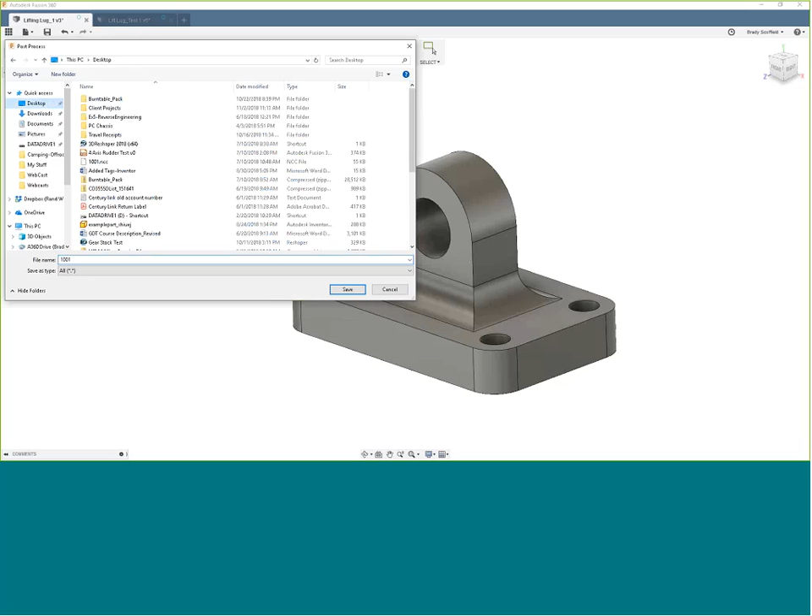And we'll hit post, and it's going to ask where I want to save it. I'll put it on my desktop for ease of access. Oh, and it's got to install something real quick, so we'll let it do that. Once you've done this one time, you won't have to repeat this whole process.

And then it's here, and it'll pop up a new window and bring in your... okay, so this one failed, probably because of the additional axis control I had on there. If I picked the correct post, it would generate what I needed.

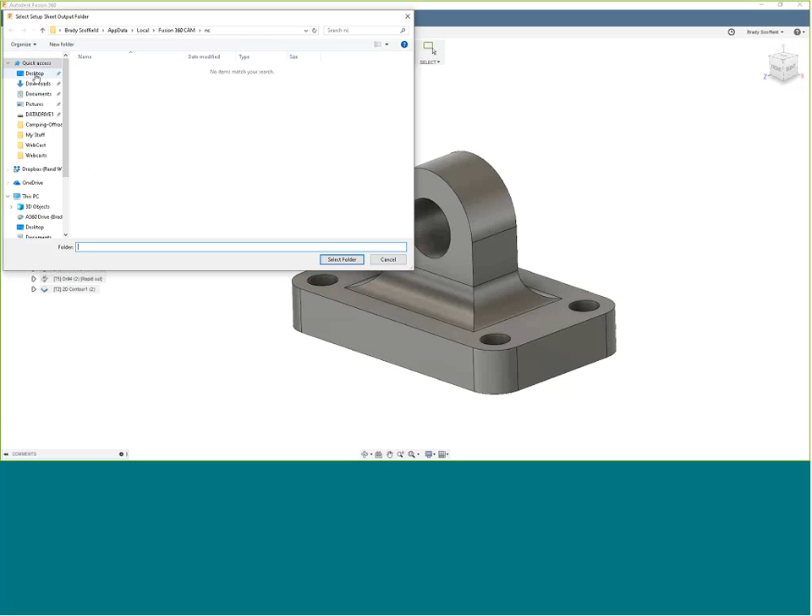Another thing you can do with these is create a setup sheet within this. It will create an HTML type document. Again, we'll just put it on the desktop.

And drag this. Yeah, there we go. It creates an HTML type setup sheet.

If you've used HSM in Inventor, it's going to be very, very similar. This is customizable. It's an Excel format that you can find in the software files and make adjustments to these, but here it'll tell you what the part's going to look like when it's finished.

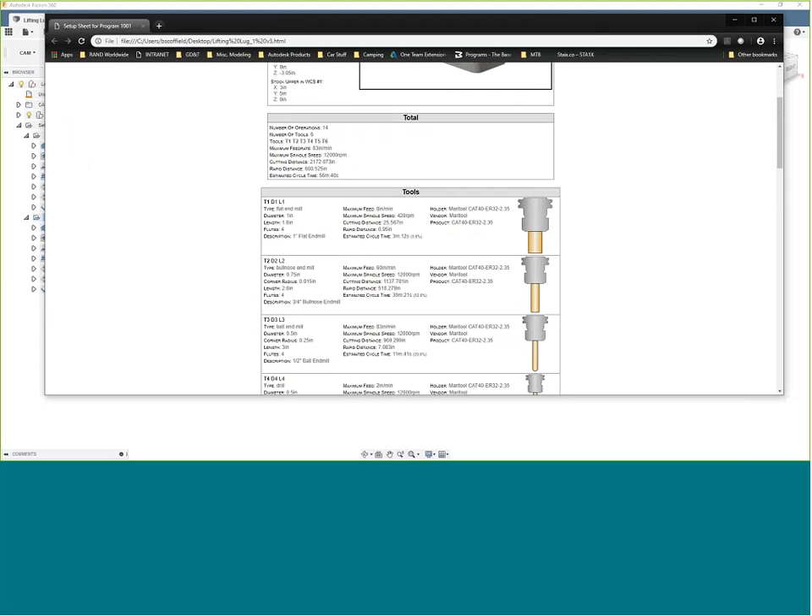Here's the stock size, the number of operations. This combined setups 2 and 3, that's why there's a lot of these here. The tool numbers, maximum feed rates, maximum spindle speed, and then all of the order of the operations and the tools that are used.

So those are the 3 new workspaces that you get access to with this combined Fusion.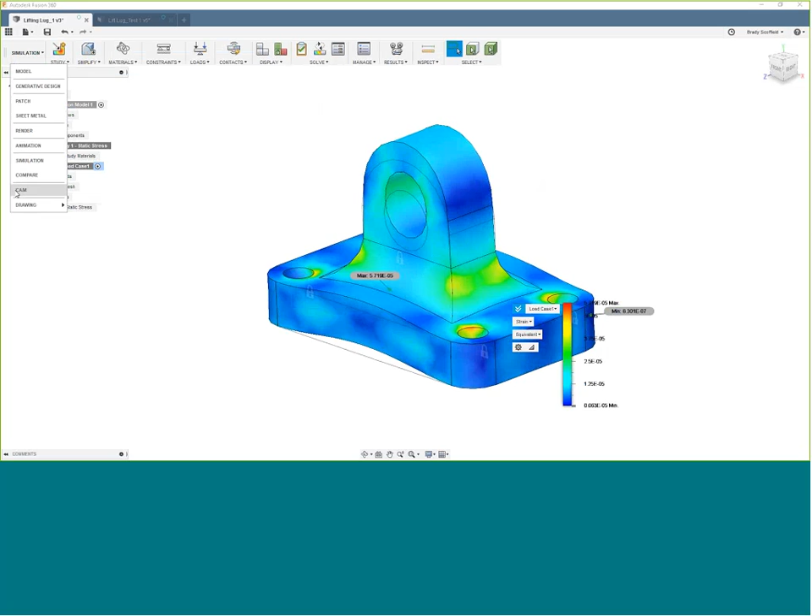Hopefully we've cleared up some of the confusion with Fusion. Now you know that you have access to generative design, where you can put in some basic requirements and then get a shape developed. There's a simulation environment where you can do load testing or FEA analysis on your part. And then all in the same software, go from the design to the simulation to the manufacturing, the CAM, right in here.

Cass, do you have any questions come through?